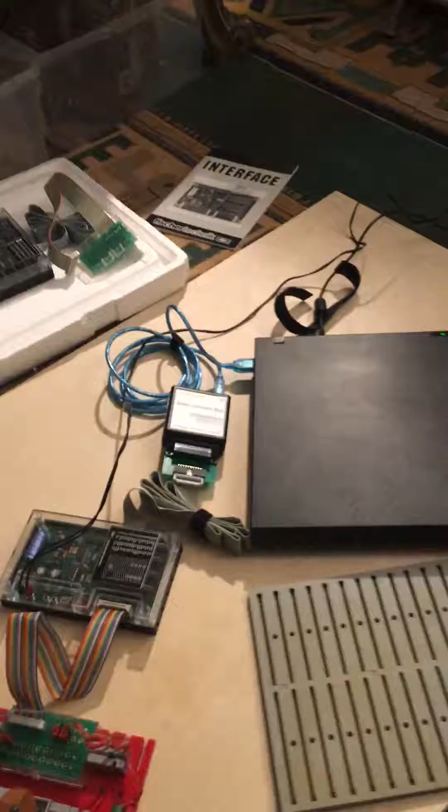Hi guys, I'm going to try and make a video of the test, sort of a little test interface here. So what I did was I removed the robot, removed the flat cable, and I've installed this test unit which

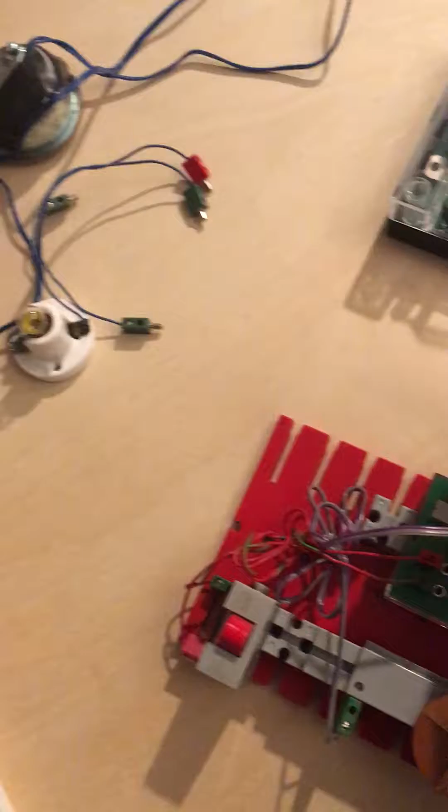has a switch, a motor, and a light connected through the interface here. The motor is connected here to M1, the light is connected to M2, and the switch is connected to E1, which is a sensor switch.

So I'm going to show you how that's going to work. So I've just reconnected the flat cable into the interface box, and this is connected to the ThinkPad. The ThinkPad will turn on. If it's not on when you open it up, you press this power button here, and you'll notice that we have two users, me and a robot.

So if we go over to the robot and select that, double click twice, you'll notice that we have some robot test programs, a bunch of programs here. The first one is the one that drives the 3D robot. All these others are other robots that you can make with different kits, I guess.

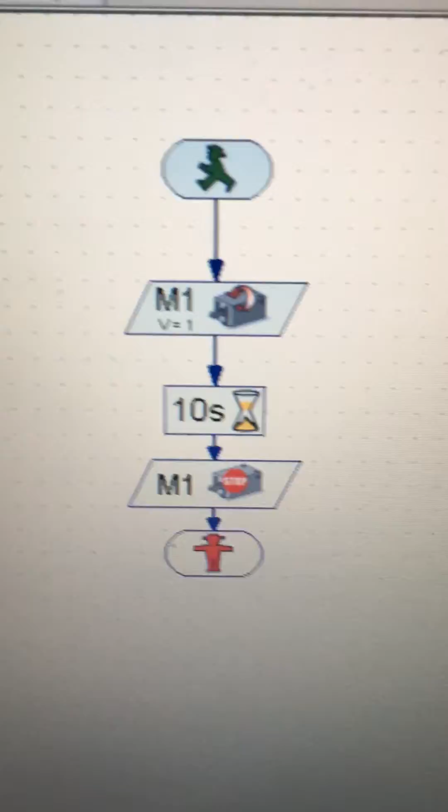So I'm going to go to the bottom here. You've got the three test programs. The first one is the single motor test, and if I double click on this one, we'll see what happens. There's a little program that comes up. The little man there is going to walk through the boxes below. He's going to walk to M1, turn the motor on

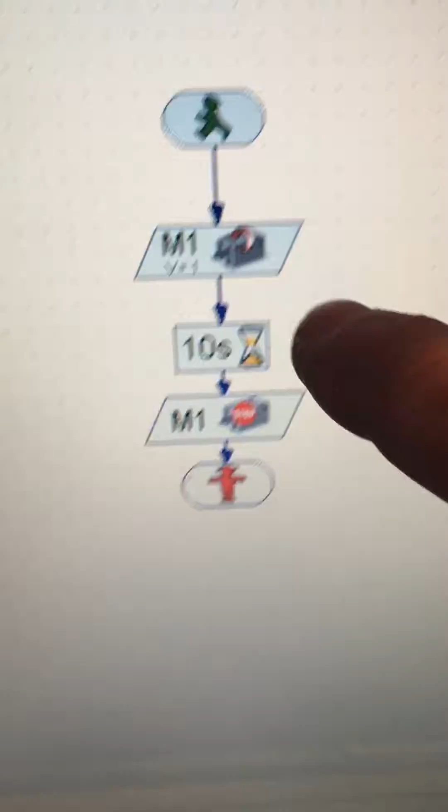here. He's going to wait for 10 seconds, then turn the motor off and stop. So as soon as I go up here to the start button, we double click on that, and sure enough, the motor, which is connected to M1, runs for 10 seconds, and then it will stop. And the program will say the program has terminated.

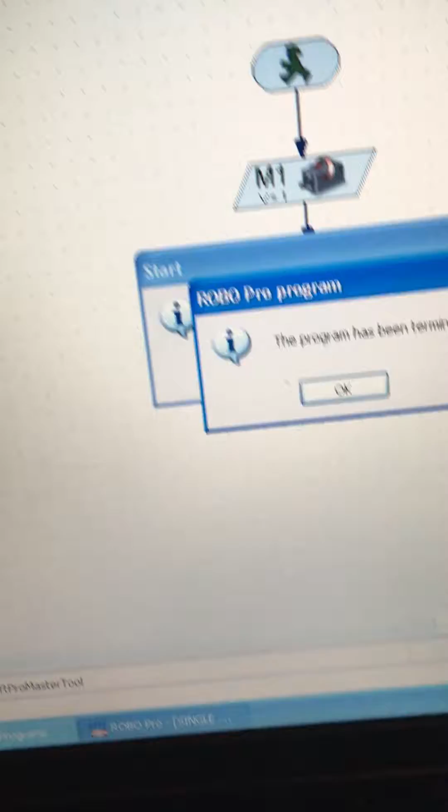So what we do is just click on the X here to terminate it. The program is okay, forget that. And we go down here, we right click on this one and end it. So this is the single motor test.

So if we go back down to the bottom, if I can find the cursor, back down here, exit or close. Then we'll go to the next test, which is the single motor and lamp test. Double click on that. Up comes this little program.

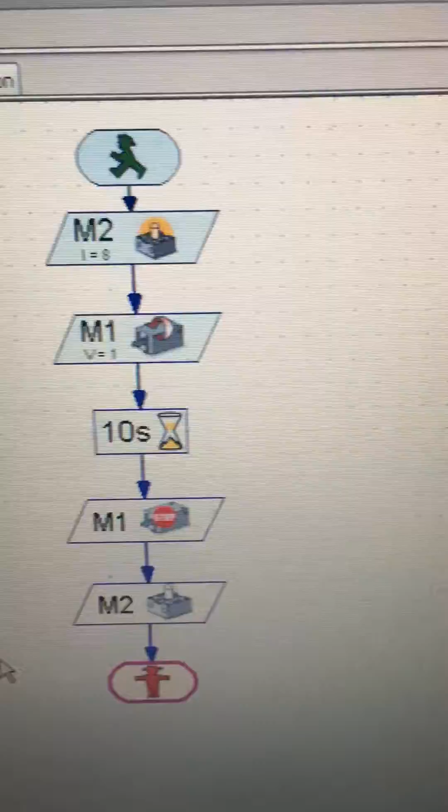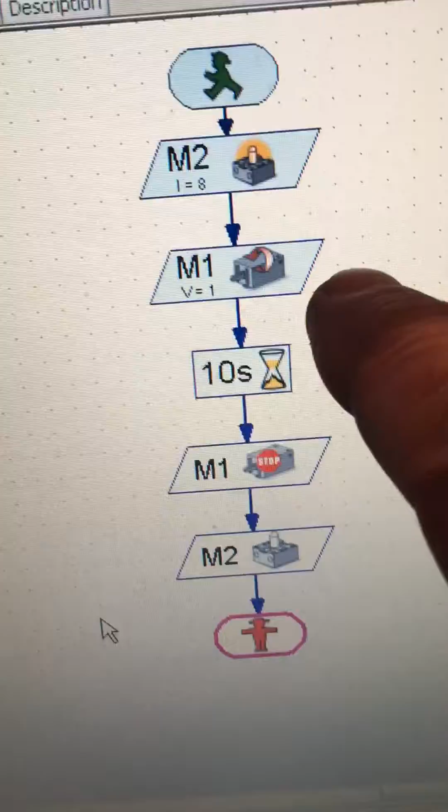So what we've got is M2 is a lamp and M1 is a motor. The little man is going to walk into the first box, M2, turn on the lamp. Then he's going to walk to the next box, M1, turn on the motor. Going to wait 10 seconds. He's going to turn off the motor and turn off the lamp and stop.

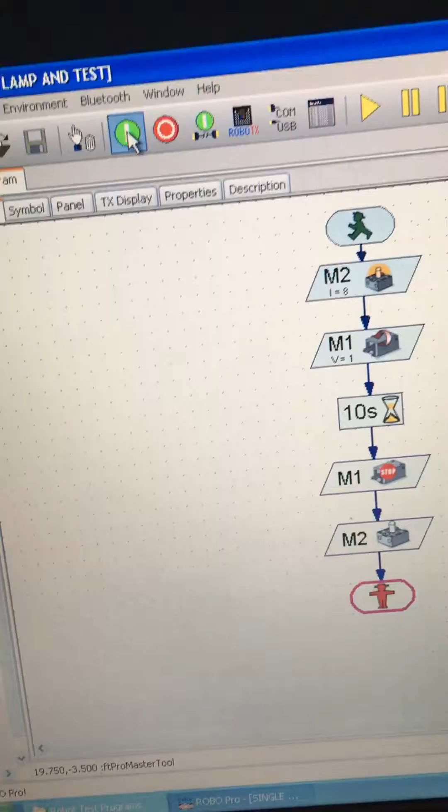So let's see what happens if we go up to start here. Press that. Okay, the light's on. The motor's turning. If we wait, count 10 seconds. 5, there we go, that's 10 seconds. It turned them off, and there's the end of the program.

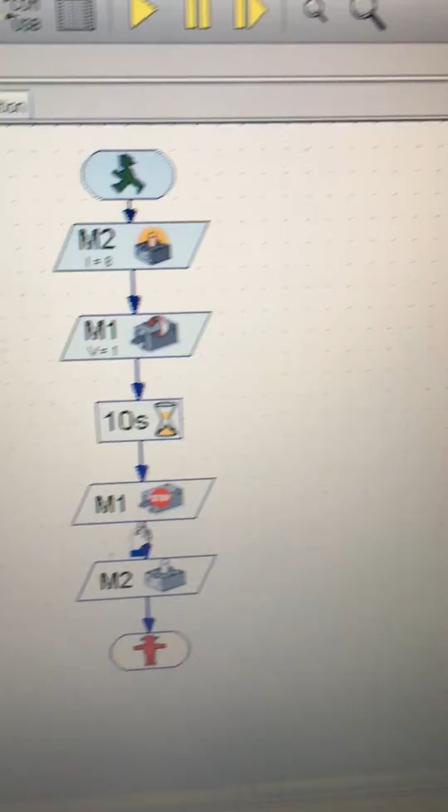So that's another test. This is a demonstration of how the programming language works. On YouTube, you'll see how to write programs like this. You just grab the item you want from over here, left click on it, drag it over, and you can connect all these together.

So this little test unit here, you can reconfigure this. You can connect more lamps, you can do other things. There's one more test I'll show you. It's the one that uses a switch here on the end.

And if we go back here and we terminate or close this one, we close this one, go back to, it says you want to save it. No, we don't want to save any changes because we didn't make any changes. Go to the last test.

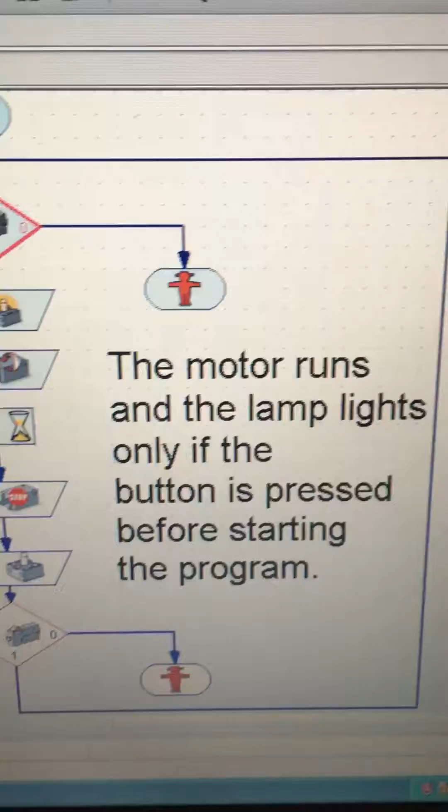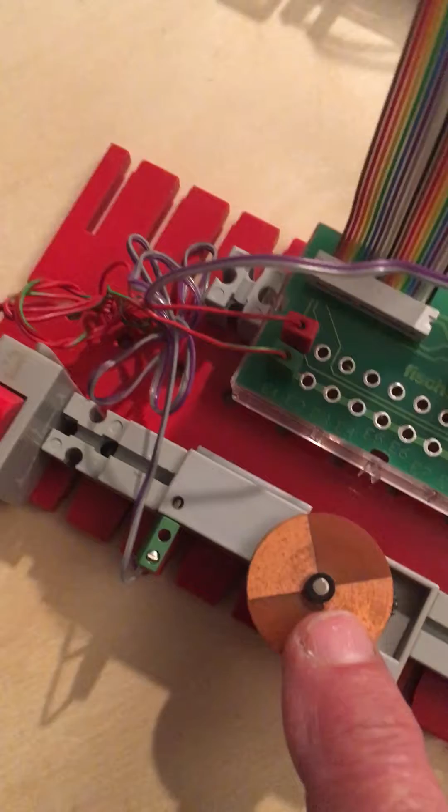It says single motor, lamp and switch test. So if we double click on that, we got another program here that says the motor runs and the lamp will light only if the button is pressed before starting the program. So here's the light, here's the motor, and they'll run only if you press this button like that before you

start the program. All right, so what we're going to do is I'm going to try and show you how this works. We're going to go up to, I need 3 hands to do this. I'm going to start this now. I'm going to press the button before it starts.

Where are we? I'm going to press the button. Then I'm going to come over here and I'm going to start, which is where the cursor is. And I'm going to do that by using my camera hand, and start. Let's see what happens. There. Aha, okay. So it runs while I'm holding the button down.

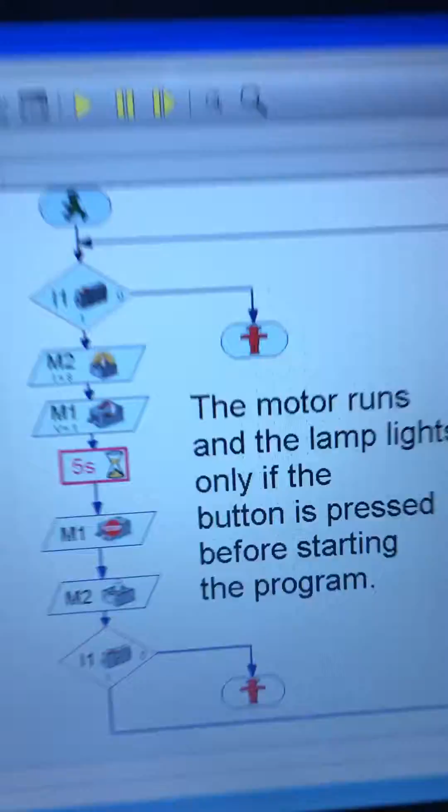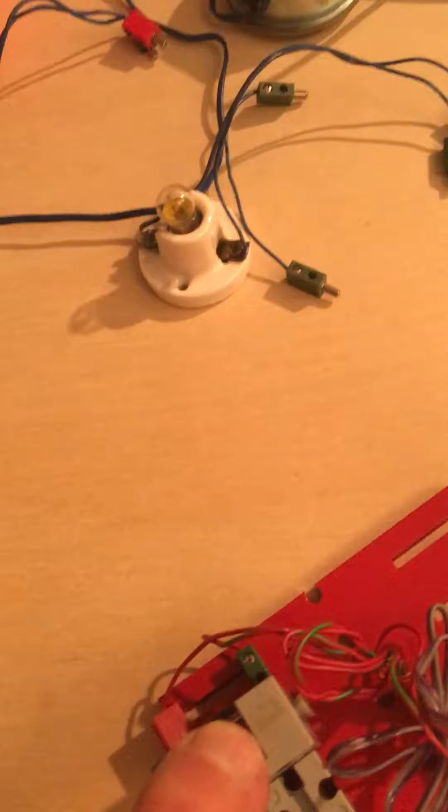Motor runs, light is on. And if you look at the program at the bottom, it loops around from the bottom to the top. And as long as this button is pressed, it will run. And as soon as I take my finger off, it stops. And that's the third test.

That's a little more sophisticated one. So you can play with all these things and hopefully add motors and lights and take them away, and hope you have fun. I hope this was clear.